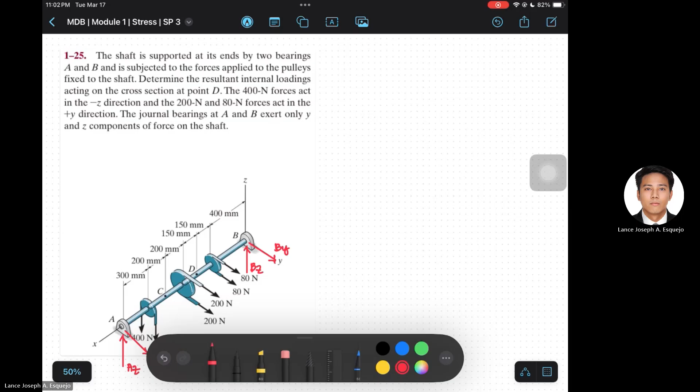Now that we have identified the assumed directions of the unknown reactions, ang next step natin is to use the available equations of equilibrium to determine these unknown forces.

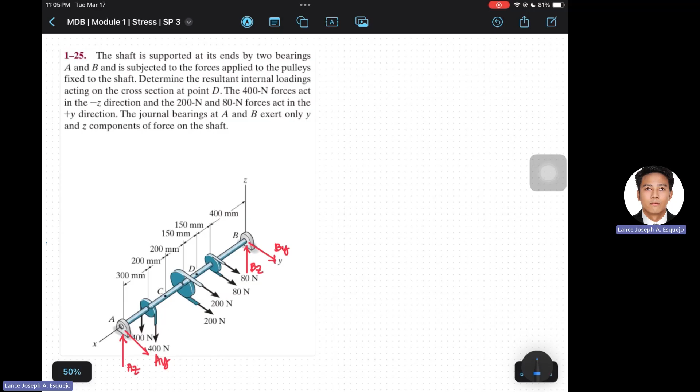Pwede nating simulan by taking summation of forces along the z-axis. We have positive AZ and positive BZ. For the applied loadings, we have 400 newtons and 400 newtons. So that's 800 newtons negative since directed downwards. And then equals 0. Let's call this equation 1.

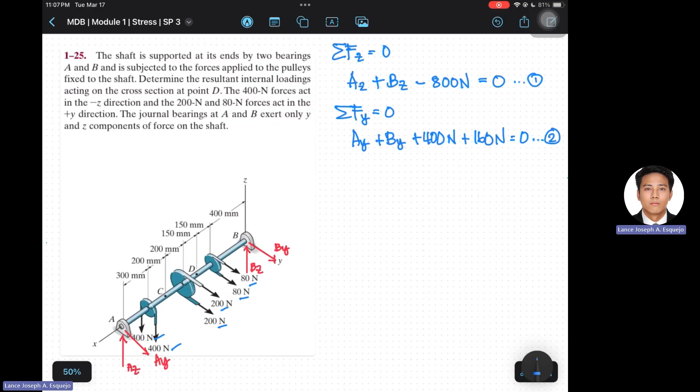Next, we have summation of forces along the y direction. We have AY positive, and then we have BY positive as well. We have two 200 Newton forces, so that's 400 Newtons positive. And then we have two 80 Newtons, that's 160 Newtons positive as well. And this is equal to 0. Let's call this equation 2. Since we don't have any loading along the x direction, the summation of forces along x is not applicable in this scenario.

So next natin, summation of moments about z-axis at point B equals 0. Pero before tayo mag-proceed, let's establish muna yung ating positive rotation. So using the right hand rule, ang ating positive rotation for moments about z is this. For moments about x, this. And for moments about y, this direction. So let's continue the summation of moments about z-axis at point B.

Since we are taking summation of moment about z, the forces directed along z will not create a moment about Z. Therefore, we should focus only on the forces directed along the X and Y axis, and in this case, along the Y direction only. First one, we have AY. For AY, the moment arm is 300 plus 200 plus 200 plus 150 plus 150 plus 400, that is 1,400. And the rotation is positive. So AY papunta kay point B. So that's positive rotation.

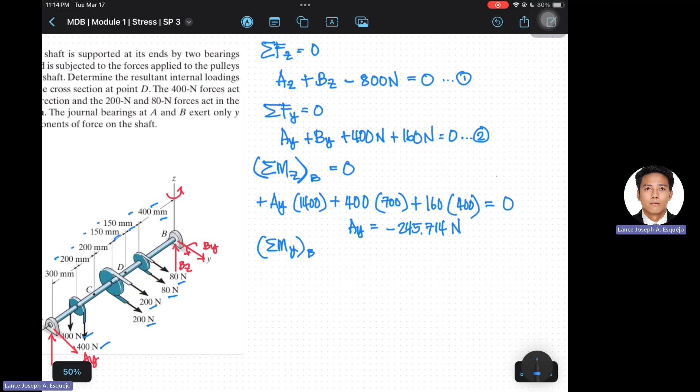Next natin is to take another summation of moment, this time about Y, still at point B equals 0. Since ang ating summation of moment is about Y, the forces directed along Y direction will have no moment created. So magfo-focus lang tayo on the forces along the Z and X axis, and in this scenario, along Z axis only. So lahat ng forces along Z, start tayo with AZ.

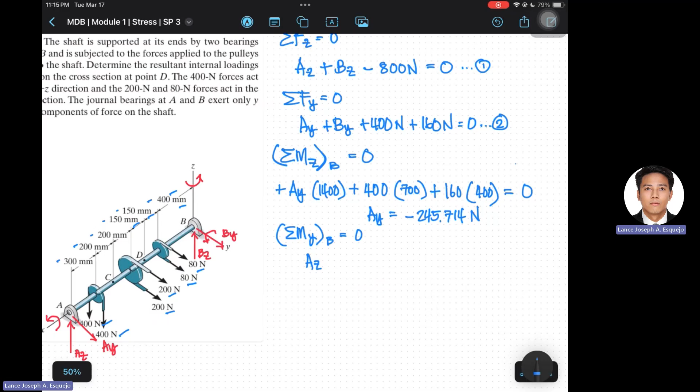Ang moment arm natin is again 300 plus 200 plus 200, 700 plus 150 plus 150, that's 1,000, and then plus 400, that's 1,400. And then the rotation, AZ, papunta kay point B. So that's negative rotation since it's against the positive rotation based on the right-hand rule.

Next, we have two 400 Newton forces. So that's 800. And then the moment arm is 1,400 minus 300. That's 1,100. And then the direction is opposite. So this is positive. And then that's it. So let's equal it to 0. Since here we only have one unknown, we can now solve for AZ.

Solving for AZ, we have 628.571 newtons. Since AZ is positive, our earlier assumption is correct. Now that we have the values of AY and AZ, we can now compute for the values of BY and BZ using equations 1 and 2.

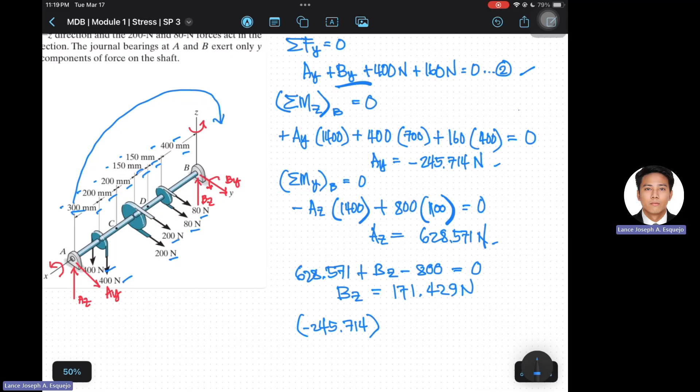We have AY as negative 245.714. Take note na hindi natin binago yung direction of the earlier assumption. So yung ginamit natin in equation 2 is just the computed value of AY, that is negative 245.714. To continue, we have plus BY plus 400 plus 160 equals 0.

Solving for BY, we have negative 314.286 newtons. Negative, that means the earlier assumption is incorrect also. If we try to look at the figure, it is evident na yung direction of AY and BY should be directed along the negative Y direction simply because yung applied forces along the Y direction are directed along positive Y.

Still, we use the positive Y direction as the assumption for us to know that kung mali man yung ating naging assumption, we will have a negative value for that reaction. Now that we have solved for the unknown reactions, we can now cut a section at point D here.

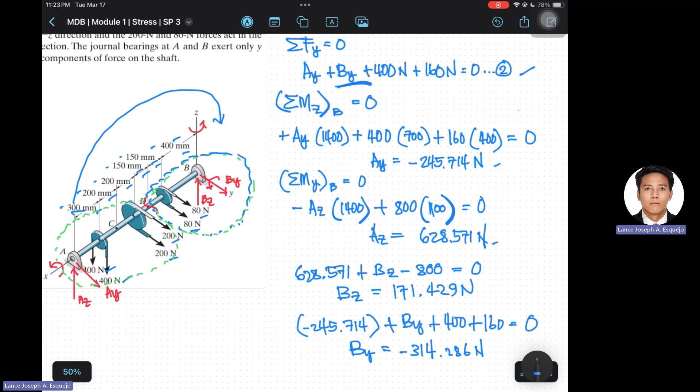And we have two options. Yung option 1 is to select this part or select the other side. For me, ang pipiliin ko is the other side, this one. Simply because lesser yung forces to be considered and it will be easier for us to compute for the internal forces. So now let's rewrite.

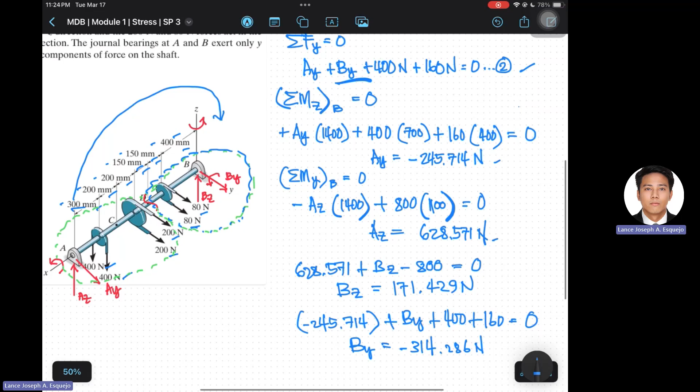So we have here the shaft. And then this is the section located at point D. And then this is point B. This is the support here. Then the reactions, we have BZ. That's equal to 171.429 newtons. And then we have BY.

That is negative 314.286 newtons. Take note that we use the direction of the earlier assumption. That's why we're using the negative value of BY. So if we use the correct direction of BY, we should be using the positive numerical value of BY.

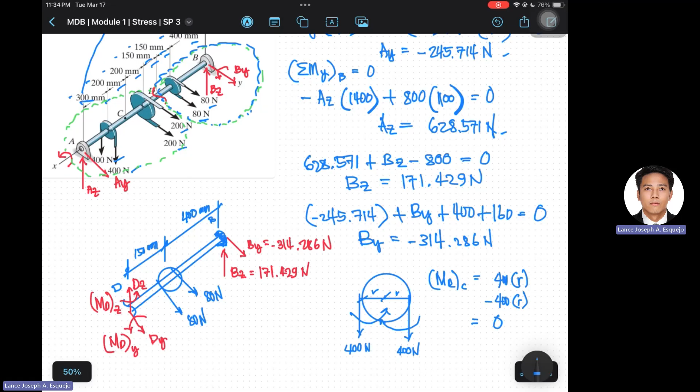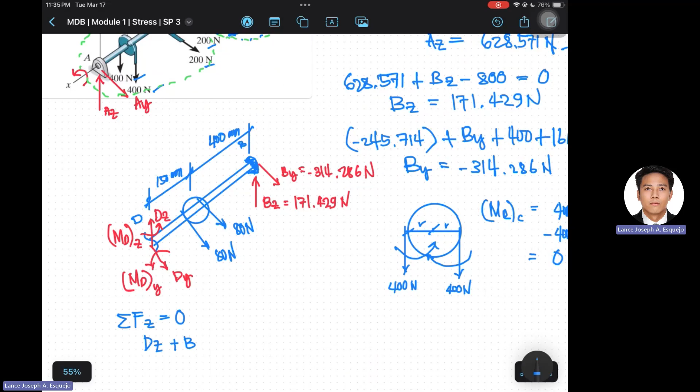Okay, going back here sa ating section, we have identified the internal forces. So we have four unknowns. Start tayo with taking summation of forces along z direction equals 0. We have DZ positive and then we have BZ positive as well, then equals 0. Next, substitute natin value of BZ. We have 171.429. Therefore, solving for DZ, we have negative 171.429 newtons.

Next, let's take summation of forces along y direction equals 0. We have positive DY, then positive 80 plus 80, that's 160 newtons. And then we have positive BY with negative numerical value equals 0. Solving for DY, we have 154.286 newtons.

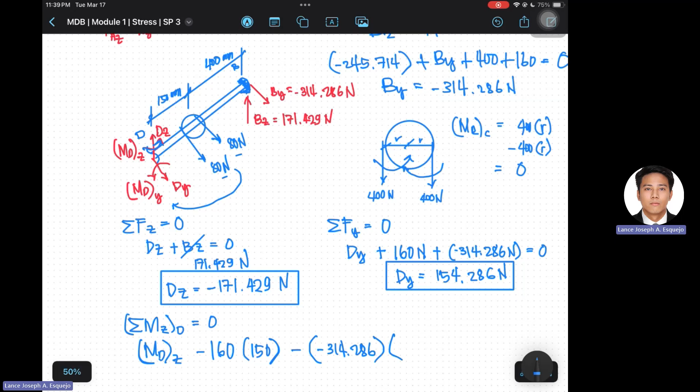That's also negative direction. And then the value of BY, that is negative 314.286. And then the moment arm is 150 plus 400, that's 550. Then equal to 0. Solving for moment at D about Z, we have negative 148,857.3 newton millimeters. Or we can just write moment at D about Z is negative 148.857 newton meters.

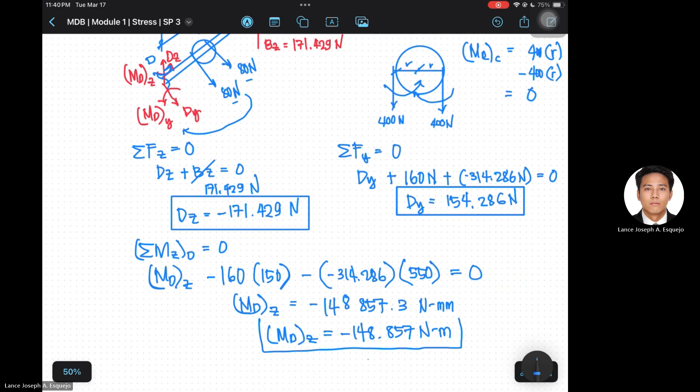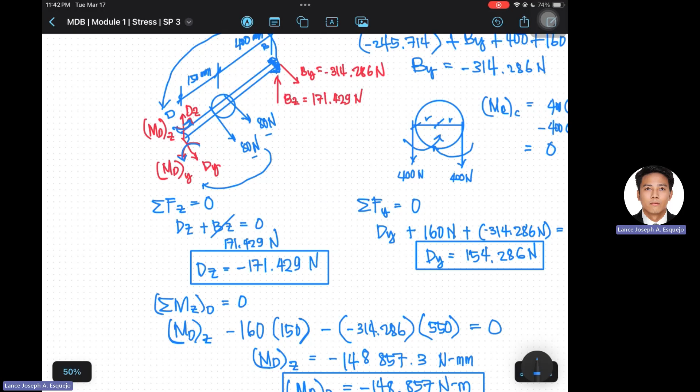Then lastly, we have summation of moments about Y at point D equals 0. Then we have moment at D along Y. Then we have BZ, that is 171.429. And the moment arm is 550. And then the direction is, since this is the positive moment, therefore BZ creates a positive moment. This is positive. And then, since we are taking summation of moments about Y, we have to ignore the forces directed at Y direction, since wala siyang makikreate na moment about Y.

So that's it. We'll have to equate it to 0. Solving for moment at D about Y, we have negative 94,285.95 newton millimeters. Or we can just write moment at D about Y equal to negative 94.286 newton meters.